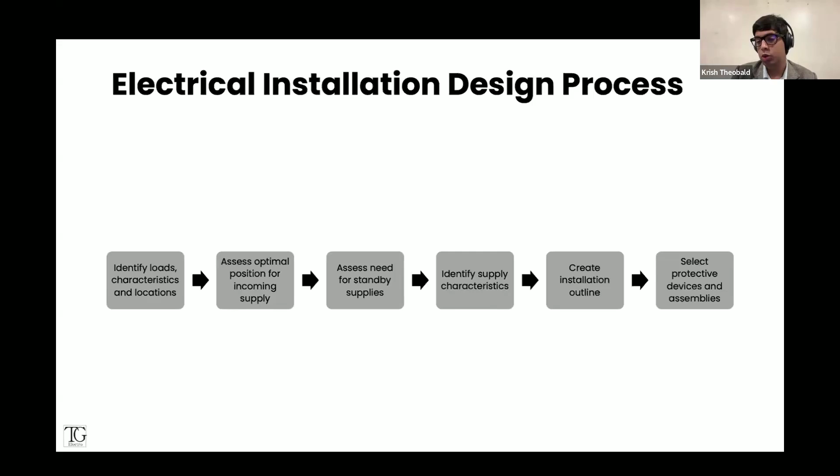Once we've decided what we want where, we need to now select our protective devices and assemblies. So this could be your circuit breakers, fuses, RCBOs, the actual panel boards, your distribution boards, so on and so forth. Then obviously it's a matter of selecting cables. So when we select cables, there are four things that we generally look at. Number one, we have current carrying capacity. So obviously, how much current can the cable carry in normal operating conditions?

Voltage drop. So is the arrangement able to provide an adequate voltage to connected equipment, the voltage that the equipment actually requires to function? Most installations have the protective measure of automatic disconnection of supply for protection against electrical shock. And as we all know, the key thing there is earth fault loop impedance. We have a supply earth fault loop impedance, but the value of earth fault loop impedance and the contribution of fault current at the extremity determines whether the device will disconnect or not. So we need to adjust the cable size to ensure adequate earth fault loop impedance is present.

We also have the cable size for prospective fault current. So, like I said, earth fault loop impedance you're talking about at the extremities, so minimum fault current. But towards the origin, at the distribution boards closer to your protective devices, we've got a relatively high prospective fault current, maybe prospective short circuit current. So it's a matter of can our devices interrupt that current, and when the device interrupts that current, your MCCB or fuses or circuit breakers, whatever, can the cable withstand that let-through energy? And this calculation has to be run from your minimum short circuit current or fault current to your maximum short circuit current and fault current.

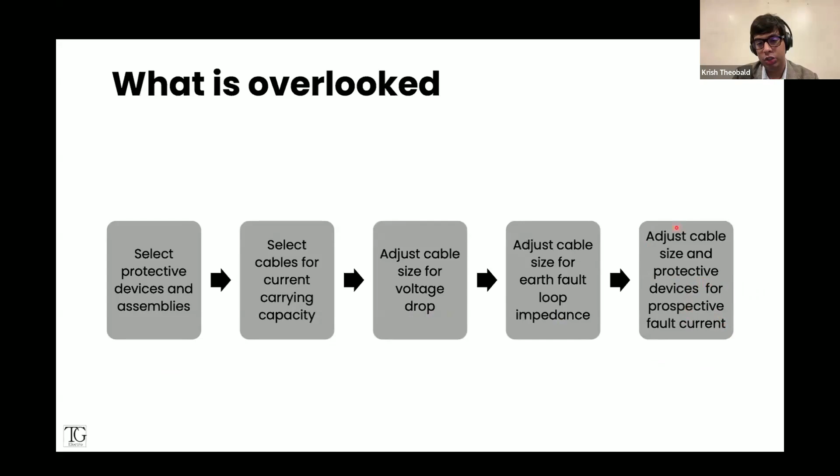Voltage drop, yeah, we do it, but how exactly do you do it? Let's look at it. Earth fault loop impedance, we don't really do, unfortunately. And those that measure earth fault loop impedance measure after the installation is erected, and then, well, you can't really do too much once the cables are already installed. And obviously, we do talk about protective devices for prospective fault current and short circuit current, but cables we don't really think about so much. So, what are our protective devices?

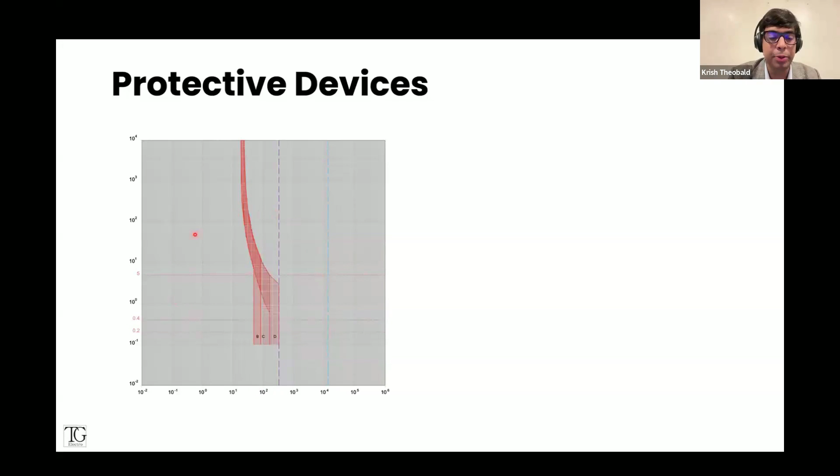We've got the MCBs that generally we use, or we also have circuit breakers like your MCCBs and fuses. These have certain tripping characteristics. And we've got your RCDs. So, overcurrent protective devices and residual current devices. Now, we know that there are the AC, A, F, and B types, but we shouldn't be using the AC. So, what are the protective devices we should be using?

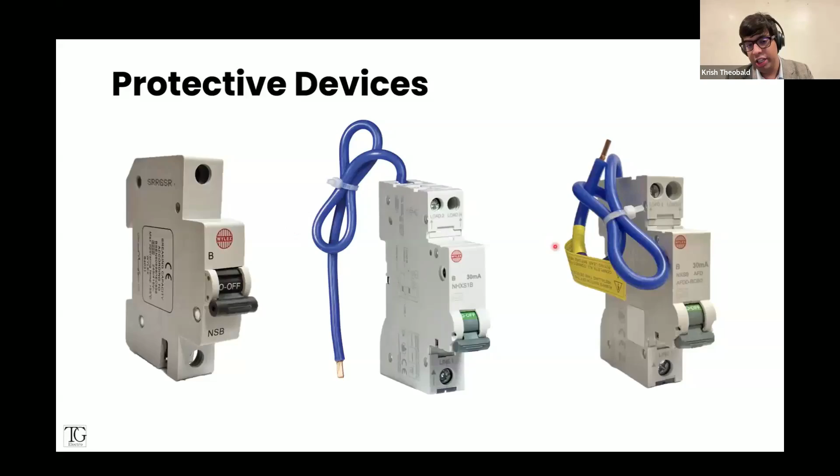So we've got your MCB here, your RCBO here, and then your RCBO AFDD as well, which is now required in certain locations like domestic dwellings. Assemblies, this is an important one. We tend to select protective devices rather than assemblies, because remember the product that we use in the installation is an assembly. So we have the 61439 series of standards.

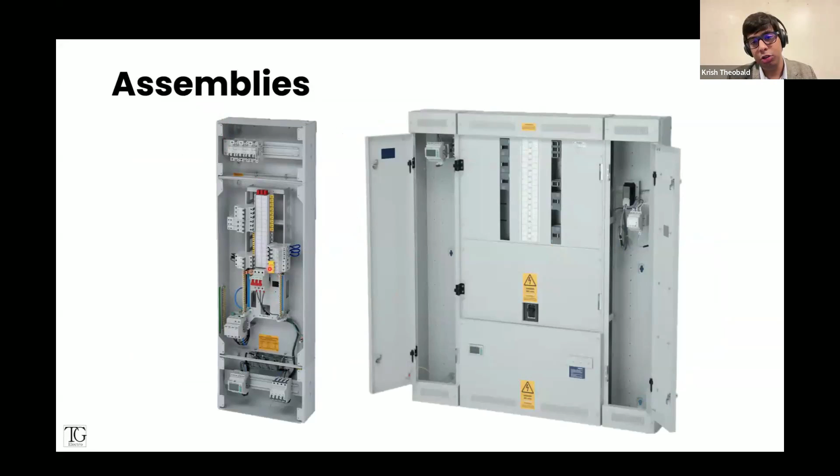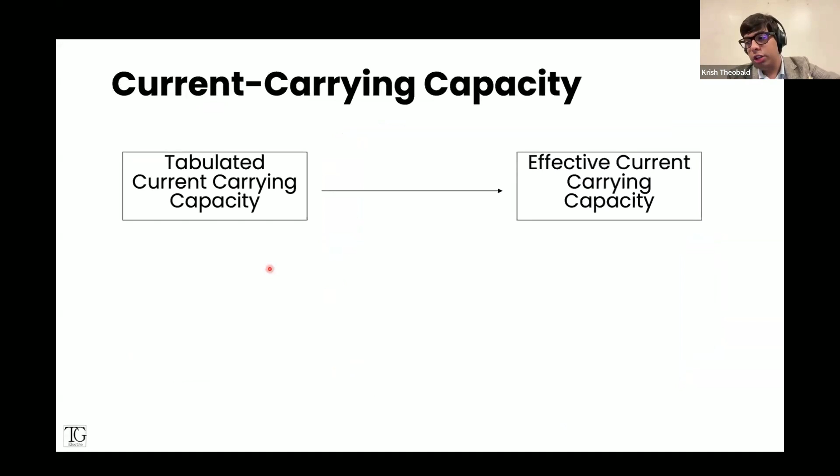Now, if it's to be operated by ordinary persons, the assembly, which is the protective device, bus bar, everything together, has to comply with 61439-3. So we have to select our assemblies accordingly as well. Current carrying capacity. Now, we have your tabulated values, which are what the manufacturer says, 2.5 square mm carries 20 amps, for instance. However, these values are very rarely what the installation actually will use because we have to correct to our effective current carrying capacities.

Most importantly, we have the factor of grouping. So, how many cables are grouped together? I often hear that in a single 25 millimeter conduit, we have something like 6 circuits, which is entirely ridiculous. Not only because it breaks the cardinal rule, which is only occupy 45% of the conduit's internal cross-sectional area, but because we're now affecting the cable's heat dissipation greatly.

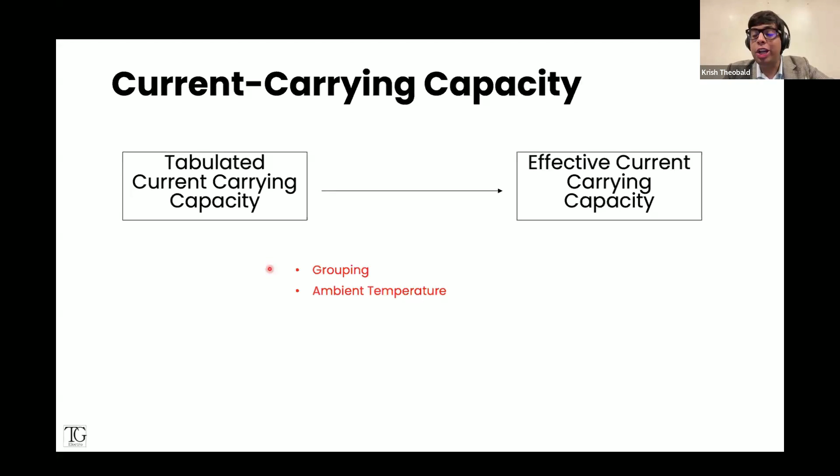Ambient temperature. So, what is the ambient temperature? The cable is tabulated to carry a certain amount of amps, rising from the ambient of 30 to the maximum operating of 70. But if the ambient itself is higher at say 40 or 45, then the cable cannot rise that much anymore. If you bury the cable in soil, the soil's ability to dissipate heat is also a factor. And if you have surrounding insulation, that's also a factor. A lot of new buildings are seeing this now. Obviously, how deep you bury it also matters.

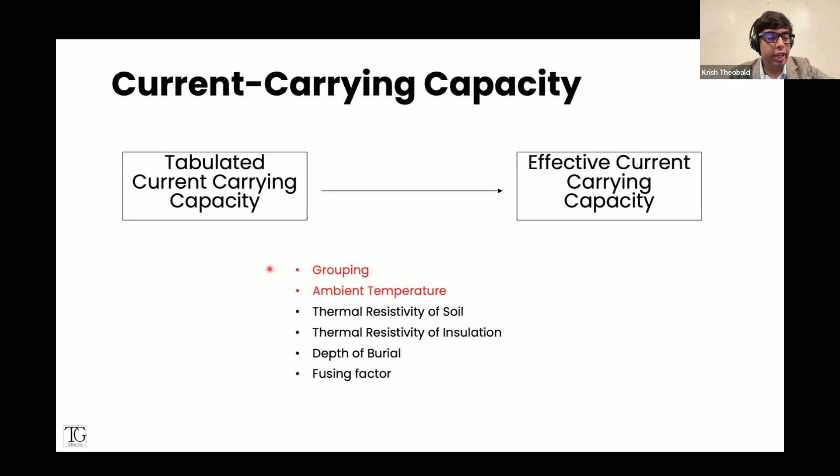And if you're using a fuse, such as an HRC fuse or a KitKat fuse, then there are certain other factors that kick in as well. I'll show you some more details. So grouping, well, we often see installations like this where the cables are very neatly tied up inside, but unfortunately, very seldom are the actual grouping factors taken into account. When you do this, you're essentially impeding the cable's ability to dissipate heat and maintain that maximum operating temperature, usually 70 degrees. On the other hand, you have this cluster where you've got so many conduits and so many cables.

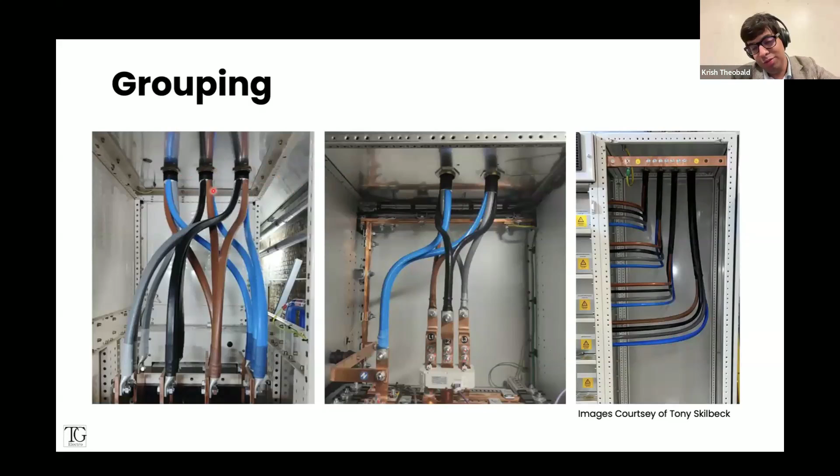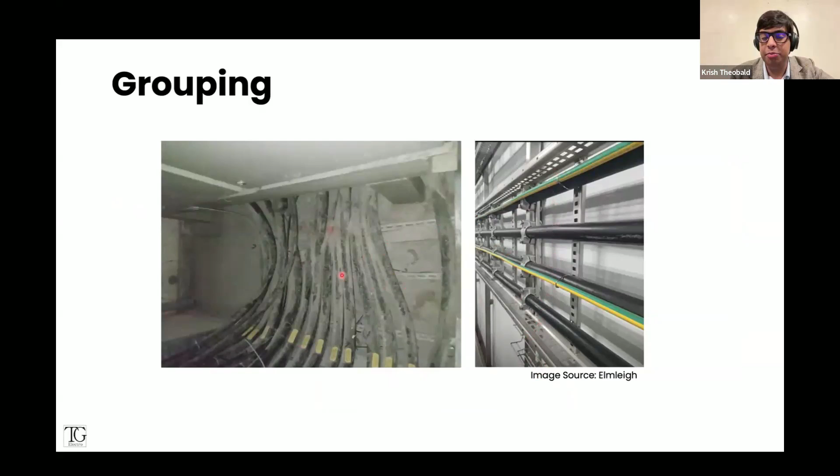Same story here. This is an image from a friend of mine in the UK, Tony Skilbeck. So, if you want to actually mitigate grouping, in most cases you can do this by maintaining two times cable diameter spacing between cables. So if you have a 10 millimeter cable, just maintain 20 millimeters between. Then, in most cases, you don't need to take a grouping factor into account. We look at our cable shafts. Unfortunately, this is what we see. Simply maintaining a two times cable diameter spacing in most cases mitigates the need for grouping factors.

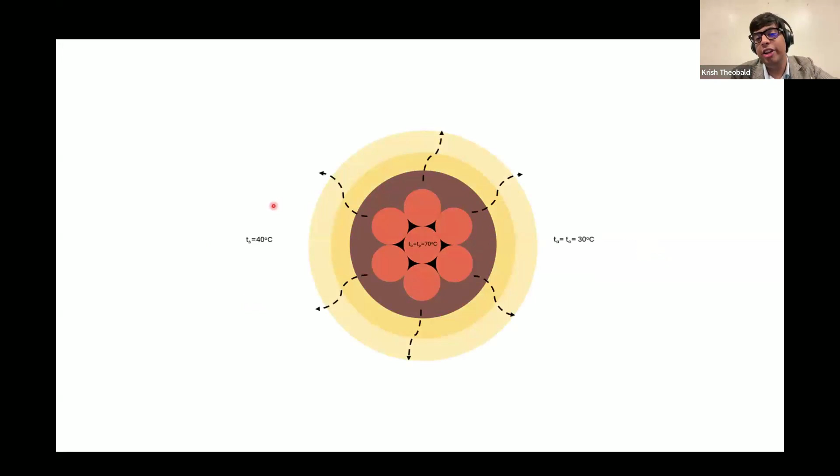So, ambient temperature. Like I said, assume we are 30 degrees outside, 70 degrees inside, right? When you are running the cable at a maximum operating temperature of 70 degrees Celsius, 30 degrees outside, 70 degrees inside, there's a 40-degree rise in temperature that the cable can handle. However, in most parts of the country, we see temperatures up to 45 degrees Celsius as ambient. What this means is that the cable can now only rise by 25 degrees. So earlier it was rising by 40 degrees, now only by 25 degrees. So obviously the current carrying capacity has to reduce.

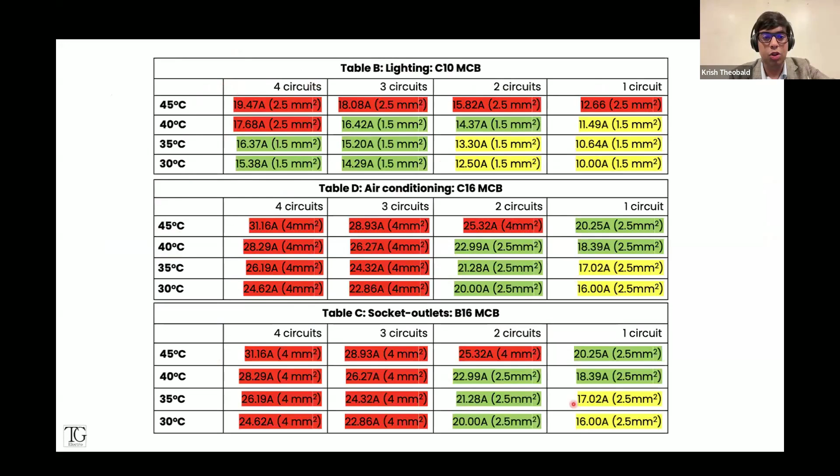Conductors as well, we've got our class 2 and class 5 conductors. We know that we have to use class 2 only in India. Voltage drop, of course, we've got 3% and 5% for public supplies, 6% and 8% for private supplies.

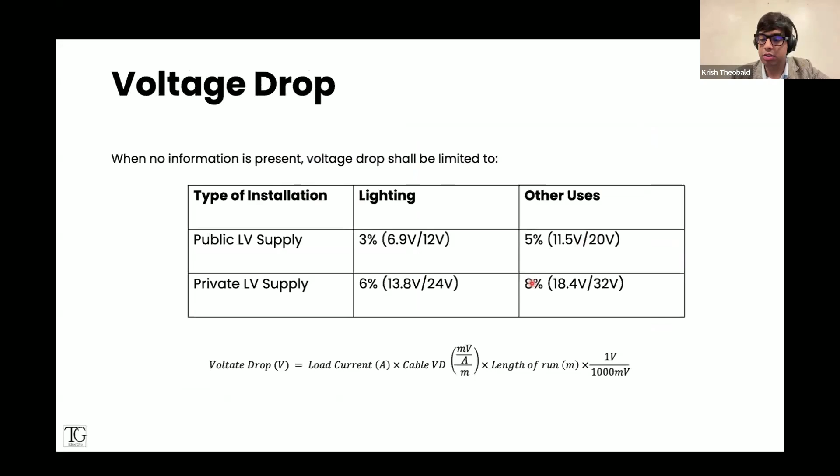Earth fault loop impedance, very important again. So, the earth fault loop impedance has to be lesser than or equal to U0 by Ia, or Zs into Ia lesser than or equal to U0. In India, we apply a two-third factor to correct for temperature. So that's that as well.

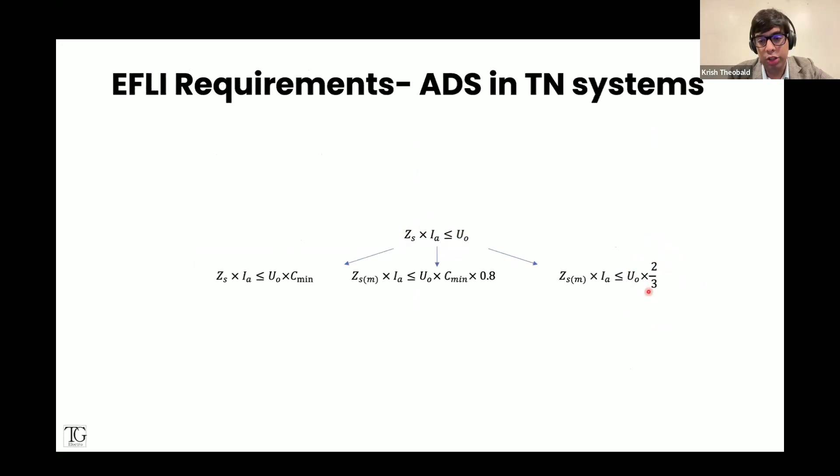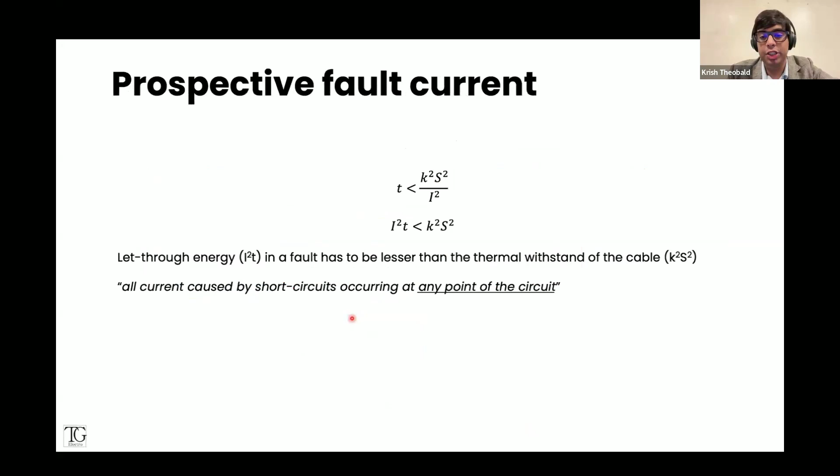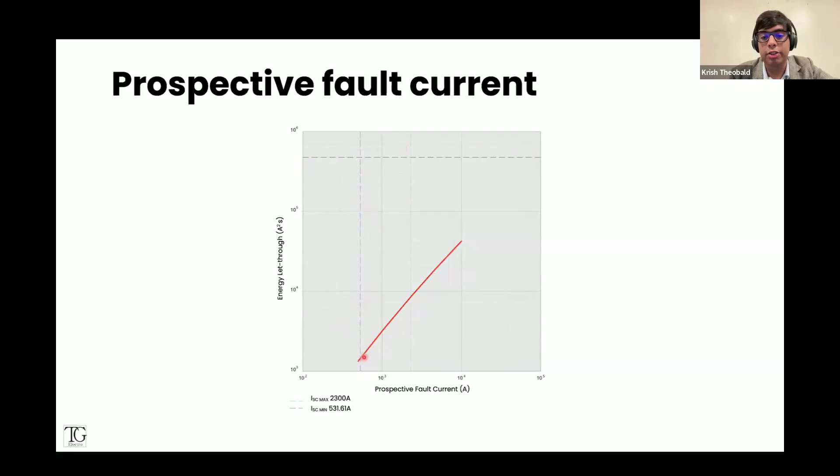So this will be a short circuit current at your extremity. This is your maximum closer to the protective device, and this is the withstand of the cable. So does our device ensure that let-through energy is always less than the cable can withstand? So in this case, yes.

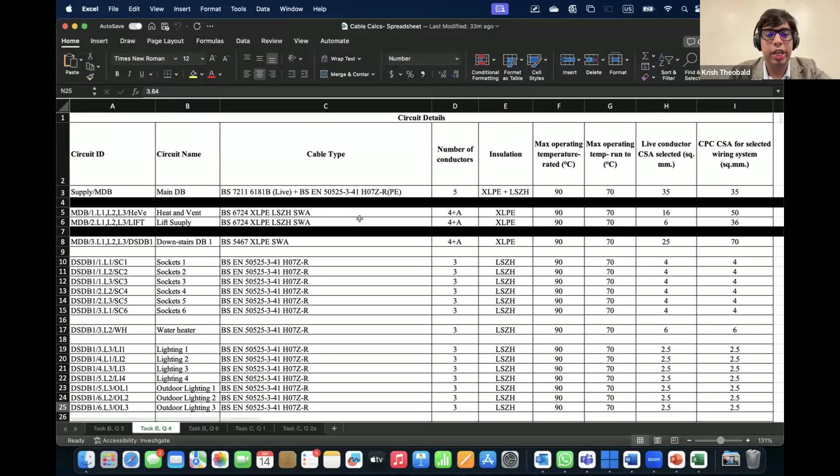Now, how do you do all this? So we can do it longhand. Obviously, I'll show you some spreadsheets as well. And yeah, it gets pretty complicated. Or you can do it with the software. So let me just show you what we're really looking at. So you see, we've got here our cable type, number of conductors, insulation, so on and so forth.

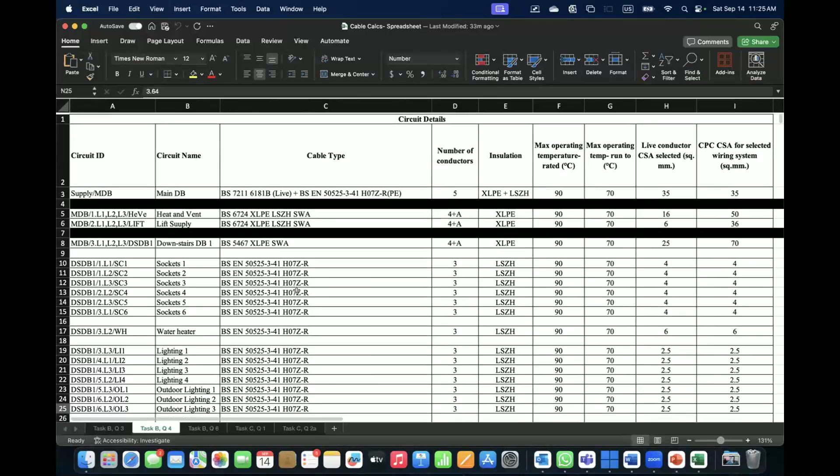What is the protective device we're using? Sorry to interrupt, Krish. Yes? Could you please speak a little louder? We are getting a lot of messages in the chat box. Yeah, little louder. Okay. Let me just see if something is affecting the volume I'm speaking at. Okay, little louder it is then.

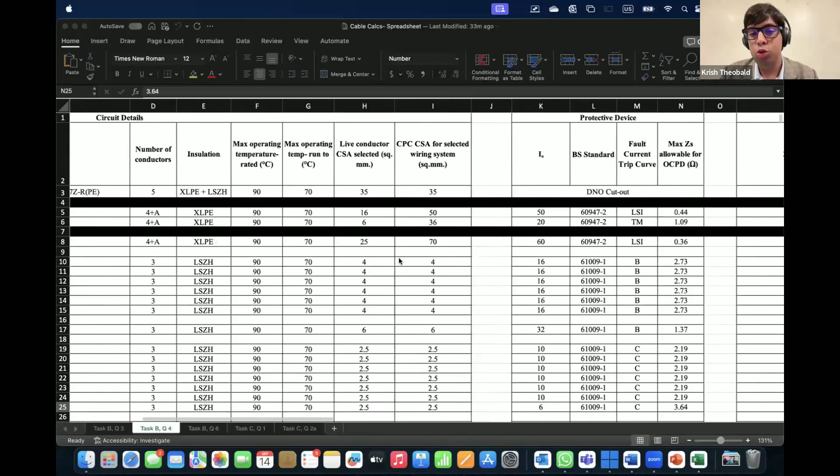Right. So we've got cable type. What is the cable? What is the maximum operating temperature? What are we running it to? Cross-sectional areas. What is the protective device? Then, what is the earth fault loop impedance? What is the resistivity of the cable? So then what is the earth fault loop impedance going to be? Is it okay or not?

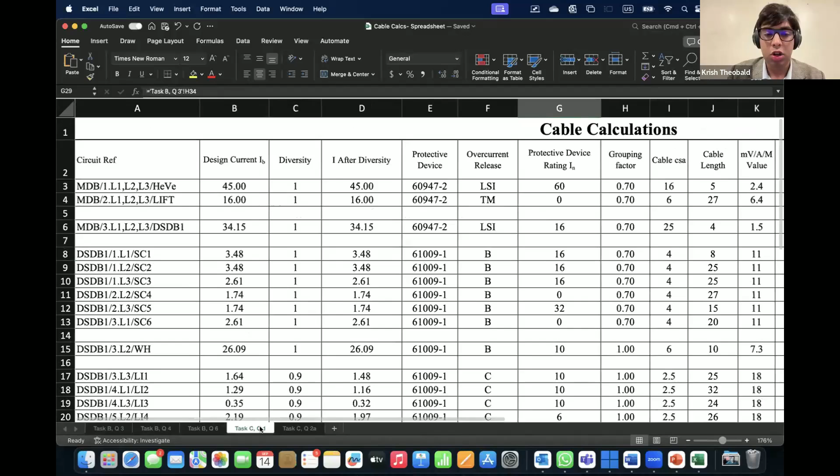Then is the protective conductor selected? Can it withstand the energy let through by the protective device? Is it okay or not? You've got your current carrying capacity, obviously, so all your rating factors. What is the voltage drop? Again, what are we running it to, and is it okay or not? So maximum demand and diversity is also there. A lot of things are there, really. Anyways, so coming back to the software, let's just open it up.

So this software is basically developed by a company called Modic which is based in Cyprus. They majorly make for the UK market. So the way it works really is that, as you know, I've been in the UK for electrical design. And essentially, what I figured is, knowing the standard is one thing, but saving time and ensuring that you're not doing any donkey work is another thing.

So the software is pretty much the gold standard to use in the UK and a lot of IEC markets as well. But in India, even if we want to comply with the standard, we don't really have access to a software. So we've partnered with Modic to bring this to India, developing an engine for NEC.

Anyways, let's just go through a very simple situation. So if I were to consider a simple source, I'm just going to add a source for now, and then we will look at the actual model that we will develop. So, say it is a simple user-defined source. We've got certain earth fault loop, prospective short circuit currents, prospective earth fault currents, and obviously symmetric short circuit currents. We've set our voltage supply. It's a TN-S installation, let's say.

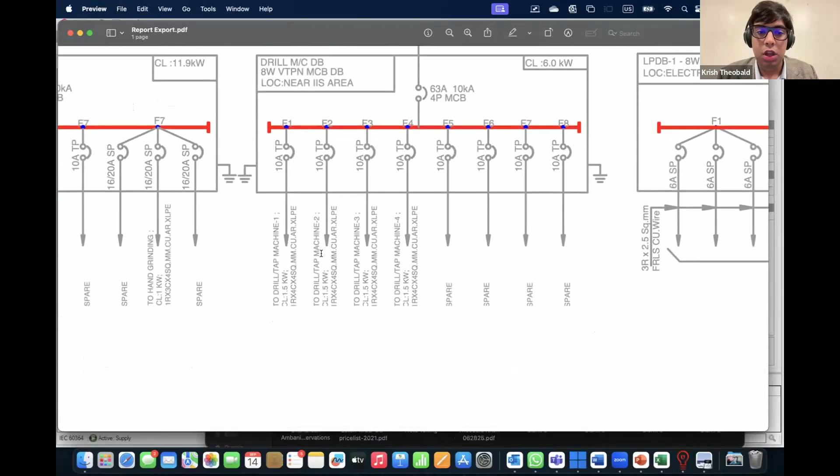Now, if I were to model a particular installation, for example, this installation here. So, pretty simple. So the first thing I will do is I will also get my CAD plan. So if you just allow a moment for this.

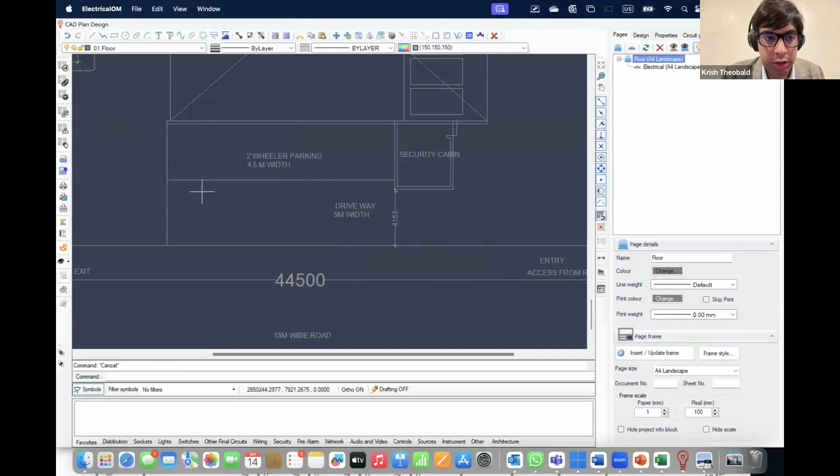So draw a line, 2 points, actually 5 meters. So I'll draw, excuse me. Yeah, 5 meters, that's fine. So I'll go here, to here, and now scale the drawing. Now we can see that the drawing is scaled. So if we look at any of the other lengths, for example, this is 2.5 meters. If we measure the actual length, we will get the right value,

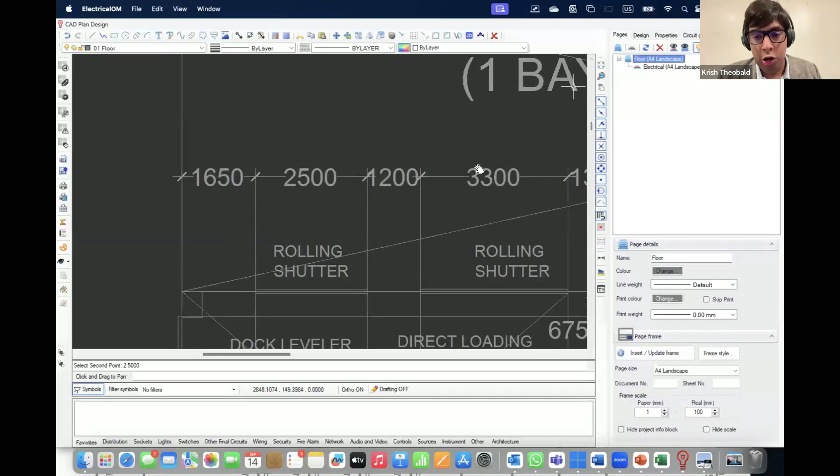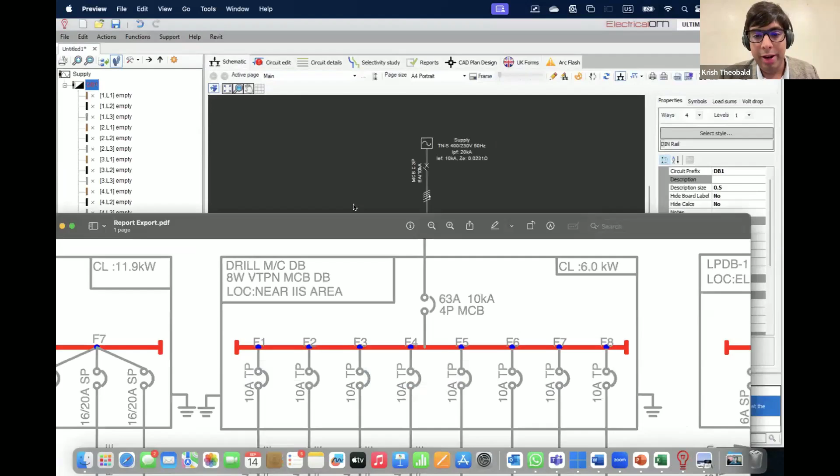2.5. So now that we've scaled our drawing, let us be creative because it's not an actual project. Let us assume that this existing panel room is what we will use. So we've got our supply, it's like this, and let's introduce a distribution board, three-phase board. Now, if we look at the original schematic, we have a 4-core 16 square mm aluminum armored cable. So let us go ahead and select that.

So I am going to select Indian standard, IS7098 aluminum. We'll run to 70 and we'll clip it direct, and we will do 16 square mm. Now you see the software is immediately giving me a warning because at this point I've got 20 kiloamperes of short circuit current that is possible, but the current default device can only do 10. In this case it's an MCB, but because we have assumed a higher short circuit current, we're going to select an MCCB.

So uncheck all, MCCB. Let's say, for example, it's a Siemens, and let's select a nice little ETU 350 product, set it to 100 amps, and we will down set it to something like 63. Brilliant. Now, it's giving me a warning that the 16 square mm is not enough because I need a minimum of 63, but in this arrangement, the 16 square mm can only carry 51. So that's where this comes into the picture. I can select a reduced 3.5 core as well if required.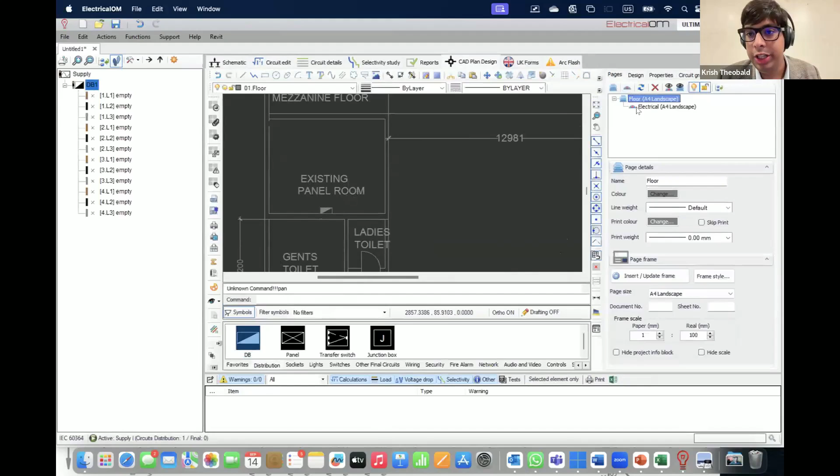Now, if I save, see the warning disappears. Now I've got my cable, and there's going to be an isolator here as well, and that's fine. Now let us model this on the actual board. So I want a DB, I want it here, I will put that here. Now, the first thing is, this is the floor layer. We want this to be in the electrical layer. So move to page and electrical.

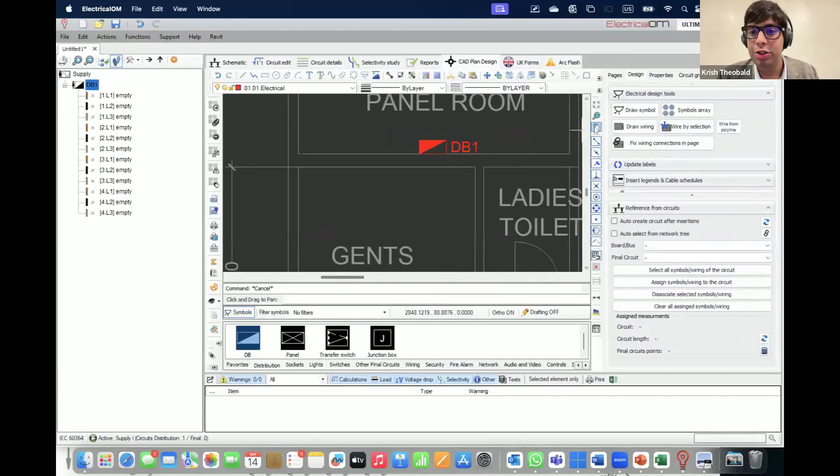So this is our distribution board. Now I will assign this distribution board to that in the schematic. So I will go to DB1, assign. So now this is my DB1 in my installation. Now, if we take a circuit, back to our SLD. We've got some drilling tapping machines here, 1.5 kilowatts each. Say it's a 10 ampere MCB and 1.5 kilowatt load. This is saying use a 4 square copper armored cable.

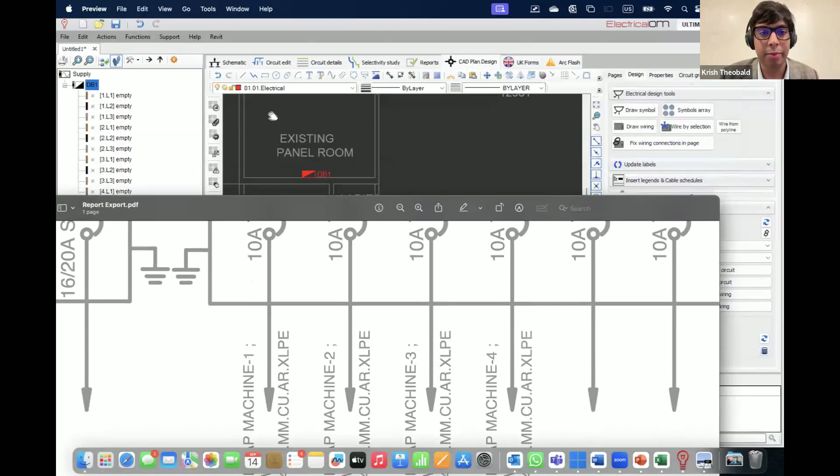So let's do that. Insert. This would be a final circuit, three phase. Let's again look at our schematic. It's a 10 ampere three pole MCB. Say you want Siemens, uncheck MCB. Say, for example, it's the 5SY series, or the 5SL, let's keep it simple. Say it's a type B in this case, as it's a drilling machine. So we'll take a slightly different device. Let's take it as type C10.

Actually, hold on. Yeah, higher. Now, let's say the run was 20 meters. So the cable is actually running 20 meters. And now again, Indian standard, copper, multi-core, so IS7098, we'll run it to 70.

Now, supply changes. Once again, you see the software is giving us an actual error because the device selected is a 6K device, but actually we will have 10.28K there. So this is what the software does. So now if you see, if I were to,

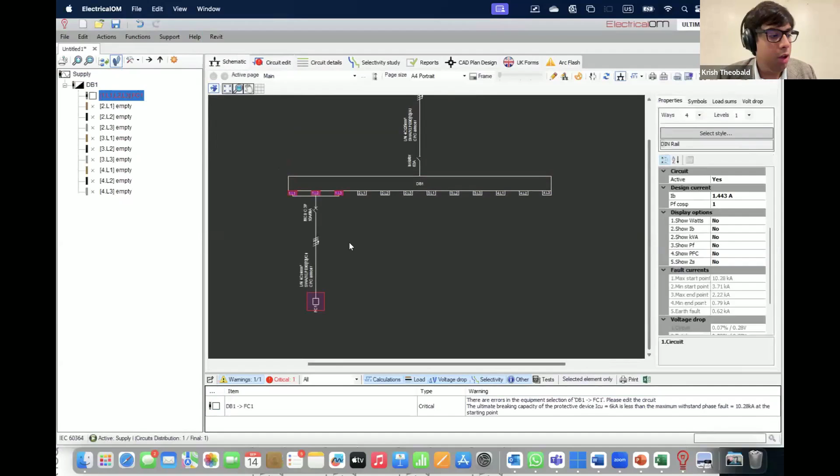Sorry, one moment, please. A little louder, I see.

Okay. Right. So you see the issue that's come up, which is how the software is quite intelligent, is that essentially I've selected a protective device with a 6K breaking capacity.

But the software has calculated that at this particular point, actually I have a maximum phase fault of 10.2K. So if I now change the protective device, this fault will go away. It's only 6K here, sorry. If I now take a different device, say an Eaton device, MEMShield 3, say a 15K type C, 10 amps, and now I refresh, that fault goes away. So the software is quite intelligent in that sense.

Anyway, so now we've selected the load. We need to enter what we call our fault current. Sorry, what is our actual load? So this tells us that we want it to be 1.5 kilowatts. So I will enter here 1.5 kilowatts. Say I have a power factor of 0.8, static. Total load, and say I have a third harmonic value of 15%. So now it's giving me a warning saying the power factor is low because it's below 0.8, and that's fine.

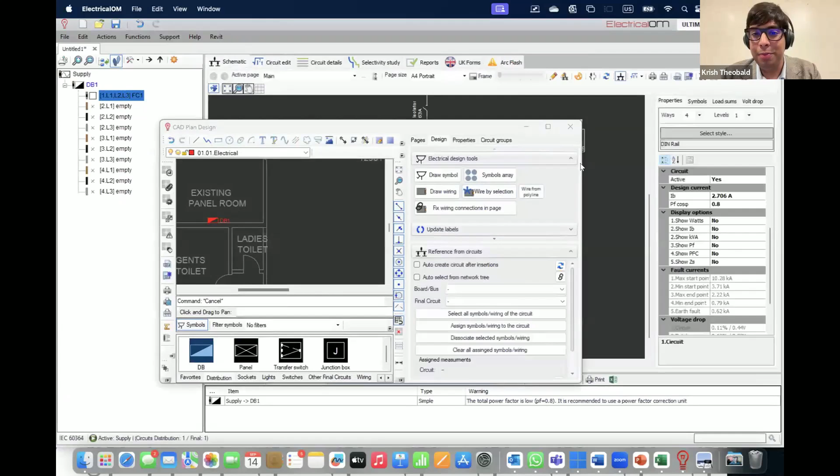Now, so I've got my circuit here, but what does it look like on our CAD plan? And this is where it gets really interesting. So, say for instance, this drill tap unit is this one here. So I will just put in other final circuits, and I can put in a fixed device. So say I put that there, and right next to it, I have this here. Now, how do I wire this essentially? The software can do it in two ways: draw wiring, and wiring by selection.

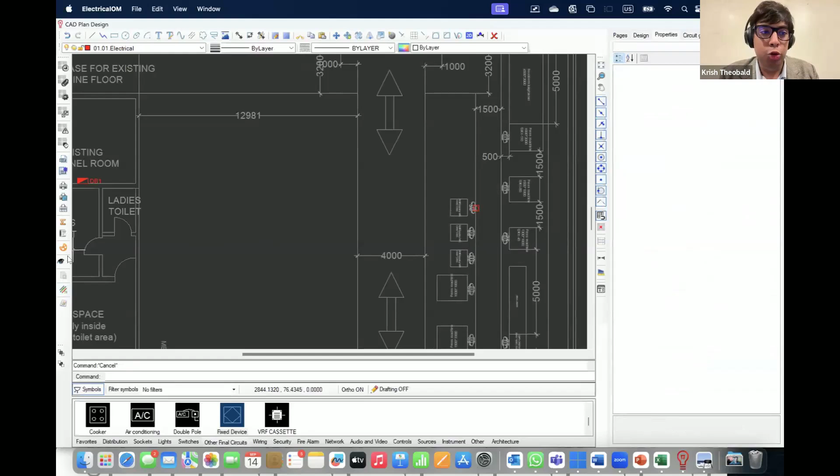So firstly, let's see what height we want this to be set at. Go to properties. Currently, this is set at an elevation of 0 meters. But say I want to set it to 1.4 meters. If you view it in 3D, we've got it at 1.4 meters as well. Now, how do we actually wire this? Obviously, you can put in cable trays, whatever we want. But let's say that we wire it at the ceiling. So that'll be 3 meters. And we wire it from DB1.

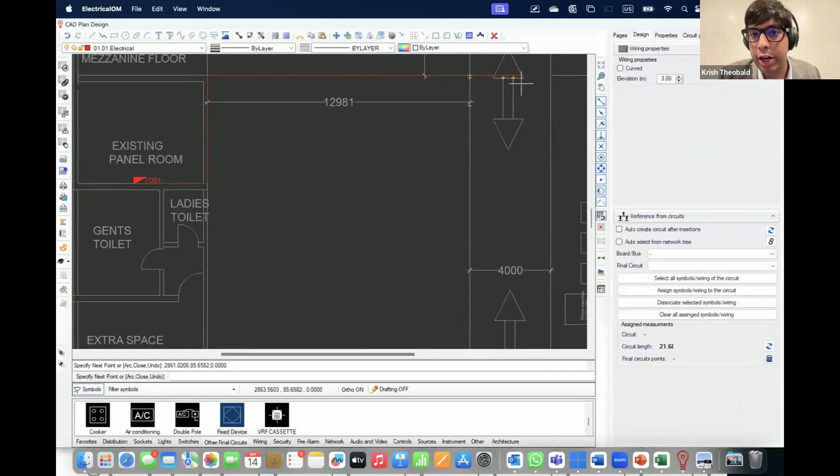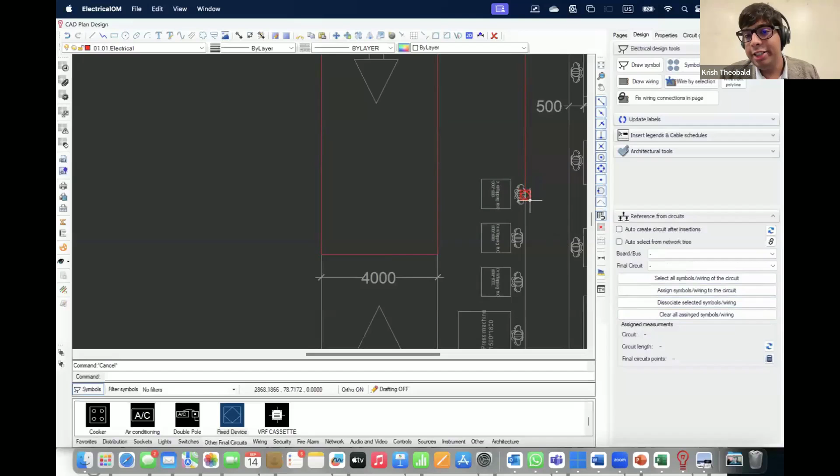So let's run it just around this wall, just like this. And let's say it had to go down somewhere here to cross. Go all the way like that. And now it terminates over here. So now we've done our wiring. Now the interesting thing is, if I select this wire, I now know how long it is in 3D. For example, if I select DB1 and assign it, you see now I know that it is 56.1 meters long. I haven't assigned this point of utilization. So once I do that, now I've got one final circuit point and 56 meters.

So now if we view this in 3D, you see I've got from my DB to my point of utilization. The interesting thing is now because I've assigned it, this phase neutral conductor, let me just make sure that it is assigned again. Yeah, I have to apply it, my bad. Apply to circuit. There we go. Now, if I go to FC1, you see 56.01 meters is my length. So this affects my calculations for my earthing. It affects my calculations for the protective device, correction factors, everything.

When we talk about correction factors, say I've got four circuits next to each other, ambient temperature of 45 degrees. It's not a problem in this case because our load current is relatively small as well. So that's how it works. Now, obviously, this has done the calculations according to everything. For example, what is my fault current at the end point? What is the fault current at the start point? How much electrical energy is there?

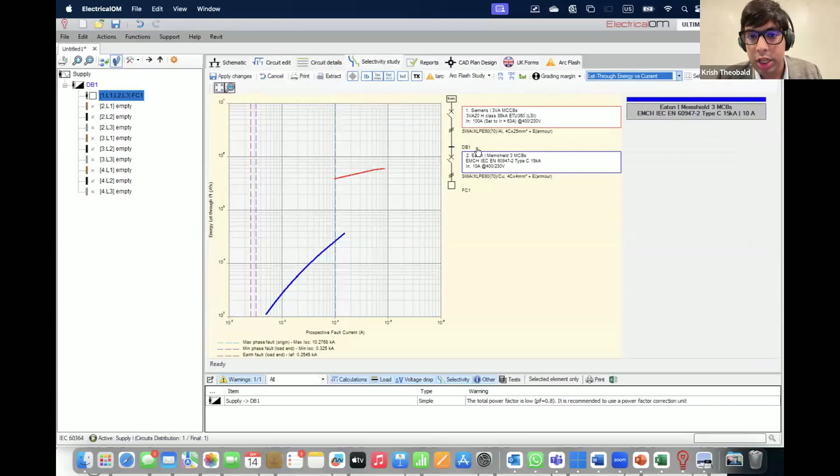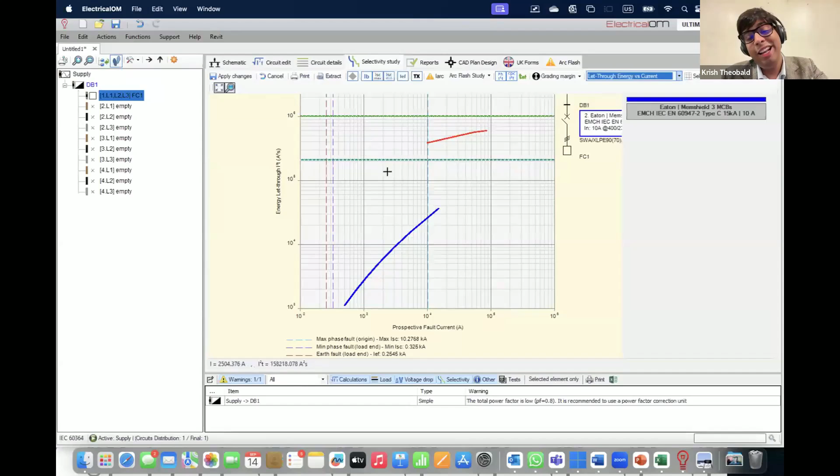If you go into our selectivity studies, you can see here that for both conductors, this is for our phase conductor, this is for the armor. The device is always allowing lesser let-through energy. So that is your thermal withstand analysis essentially. Then say we go to a protective conductor, it says this is the conductor, this is the length, this is the cable, this is the armor, this is the minimum current carrying capacity required.

So whatever cable ID we want to put, is it an FR cable? Is it rated to 70 degrees? Is this the maximum operating temperature? So on and so forth. Now, for example, in India, it's very common to not only utilize the armor, but have an external conductor. So I will say core of the armor and separate conductor. Say it is touching. We want a copper conductor, and we set this to another 4 square. So now we're good.

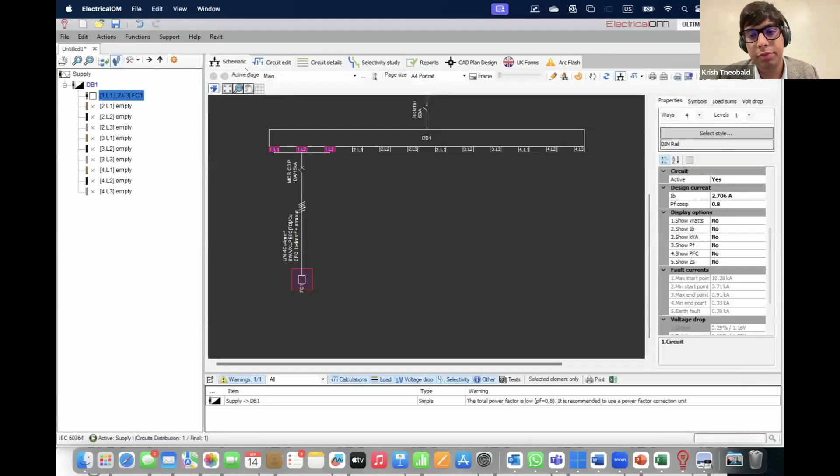Now let's look at one of the other ones. In this case, these are all drill and tap machines. So I am going to switch it up a little bit because this was a relatively easy circuit to model.

Say for example, I want to install a socket outlet circuit. I'll do that here. I will insert a circuit, a final circuit, single phase. We'll choose a D16 RCBO this time because you'll need additional protection.

You can select type AC, AF, and you see by default it selects type AC. And say we run it in steel conduit, so metallic conduit, heavy, 25 meters, and we can put in a number of bends that will do that calculation as well.

Now it's asking us, is the circuit protected against mechanical damage? It's a requirement of the standard. So if I say yes, we're good to go there.

What is a circuit? Say for example, it's a radial socket outlet circuit. So I select that. I'm assuming say 200 watts per circuit. And how many circuits, I don't know.

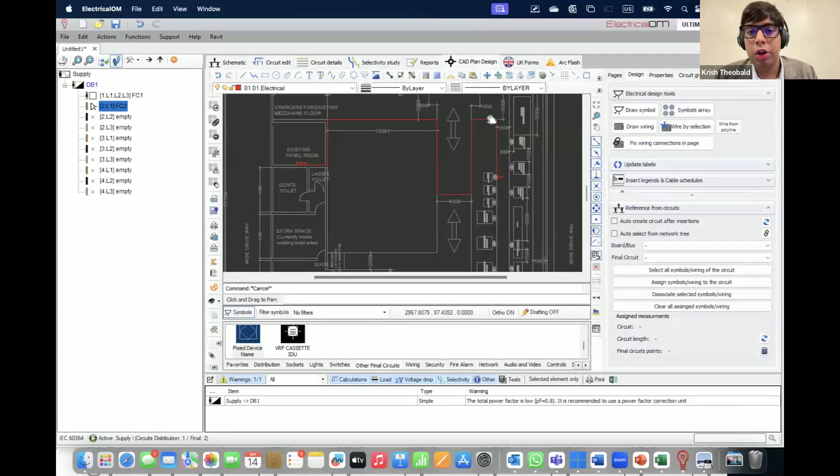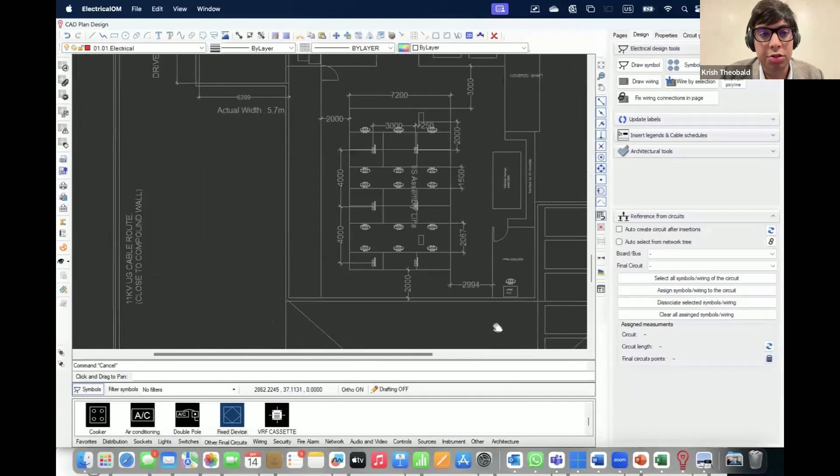Let's look at it in our plan. So what are we looking at? Say it is for a computer, right? Let us assume that we have this... how can we be as creative as we want to be? Let us say that people are deciding to work on some computers over here, in this open area. So we add in our sockets.

Say you want to add in a single socket or a double socket. Say we add in a double socket. It allows us to add it here, here, here.

Now, what I will do is obviously, aside from a socket, I also need some other things. For example, each socket I install, this is to generate your bill of materials. I'm going to need, say, a back box as well.

So if I go into... one moment, please. I go into your item codes. I can start adding items. So if I say add, I say 8 module back box, add, and per socket I want one back box.

Then say per this thing I also want some ferrules, lugs. Say I want to add... forget lugs, let's use a better example, connectors. So a three-way connector. Let's say I want to do two of the three-way connectors and one of the five-way connector.

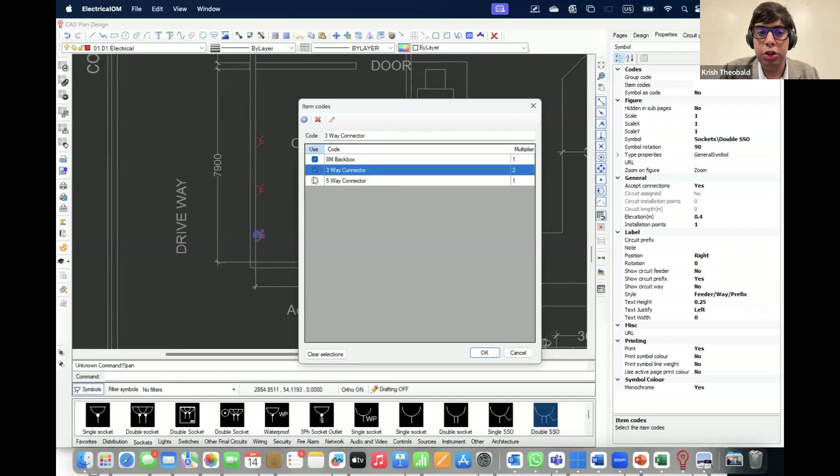So now I say I use all of this. Now you see, for each socket outlet that I'm adding, I get all of this. And I can select all of these. Another thing I can do is right click and say select similar. So I've selected similar, and now in item codes, I've got these all selected.

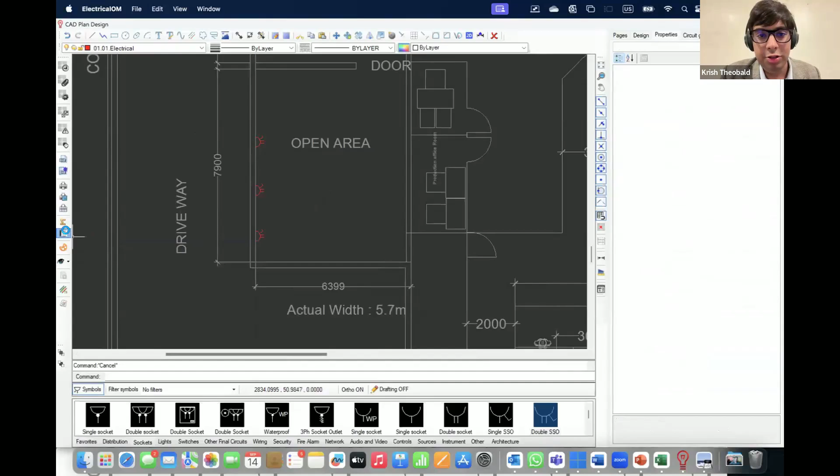So now how do we actually get the bill of materials? If I click on this summary, I say three back boxes, six three-way connectors, three five-way connectors. So now I've automatically got this bill of material as well.

But now, how do we actually correlate this to the actual schematic? If we go to our design and we say wire by, let's actually say what height we want this at. Yes, raise hands, Nandu and Lakshmi, all are monitoring the chat.

Now, this is assumed to 0.4 meters. Say I want to do 1 meter. Now, if you see, it's actually done to 1 meter, right there. So that's that.

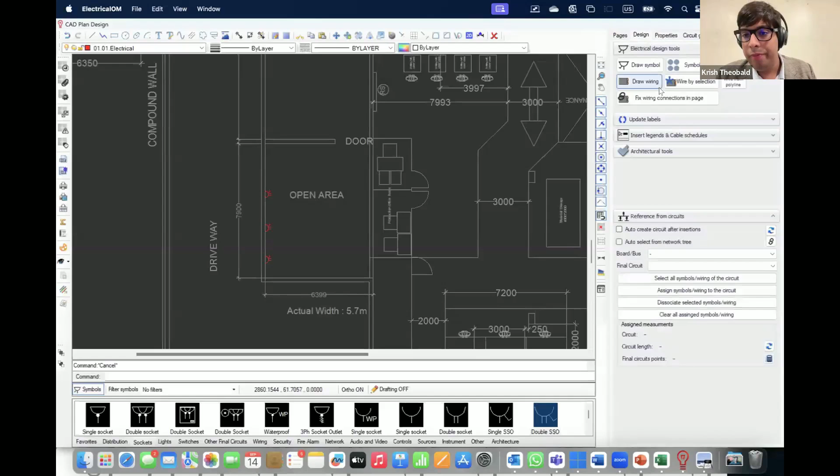Now, if we actually wire by selection, these three will be in 1 meter. So I go 1, 2, 3. I've got them wired. Now, how will the wiring actually go?

Say I want to wire this to the ceiling anyways. So start here, and for argument's sake, let's assume that we want to get this. For example, let's have it run here, here. Let's have it run straight up actually and meet the distribution board somewhere around there.

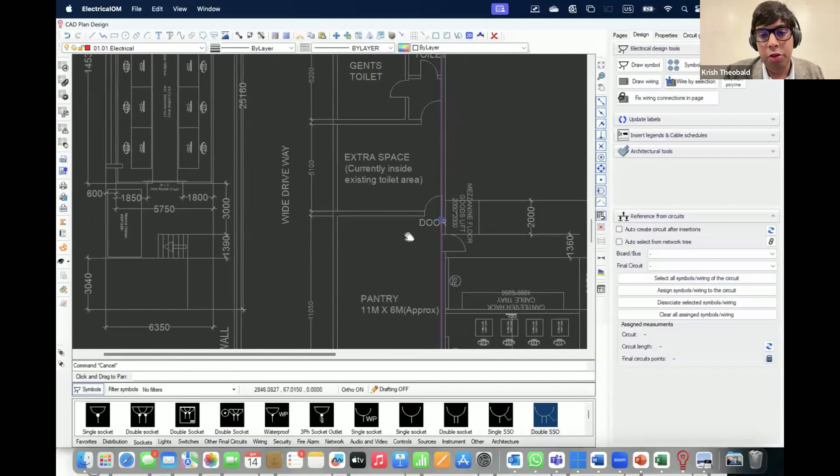So now what I'm going to do is select this cable run plus all of this. I'll say DB1 and this is FC2 assigned. So three symbols and three wires are assigned, and apply. Now you see 42.13 and final circuit points 3.

So currently we have set a double socket to be a single utilization point. If I do select similar properties and change this to utilization points 2, now it's automatically 6, and if I apply, that goes there.

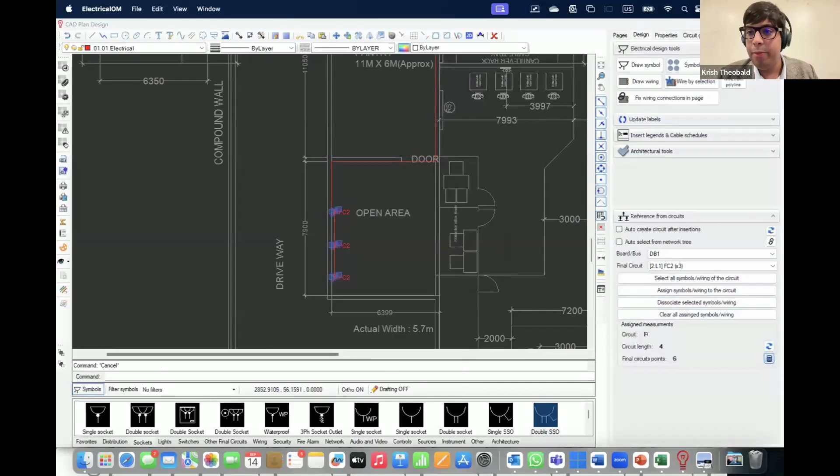Now if I shut the CAD plan add-on and go to my circuit edit, you can see I've got 6 into 200 watts and 42.13 meters. Automatically it tells me what the load required is. Now if I increase this to say 1000 watts...

Automatically it's now telling me that I have an issue - I can no longer use this. My load current is exceeding the protective device rating. So say if this was 700, that's still an issue. Well, is it? Yeah, still an issue. So we'll take it as say 500. Yeah, that's not an issue actually. Even 700 is not an issue - that's just a different warning.

I'll show you what I mean. So what it's essentially telling us is that we have a design current of 18.26 amps and our device is only rated to that much. So if I change this to say 500, I don't have that issue anymore.

However, it's flagging a voltage drop issue. So if I go to voltage drop, I've only allowed 3.5% voltage drop on this. I can obviously user-define it, say I want 4% voltage drop, but I'm actually getting 7.2% voltage drop. If I increase this from 1.5 to 2.5...

I'm still getting 4.57, which is relatively high. If I increase this now to 4, the voltage drop issue goes away. So that's how it actually works.

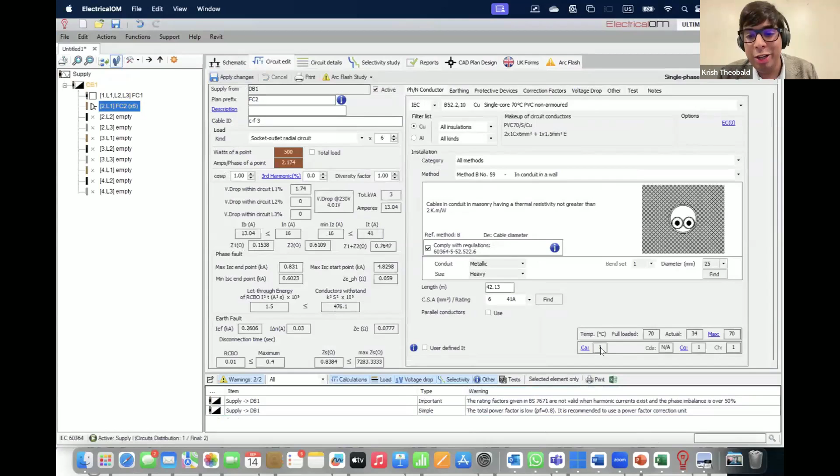So I'll need to do 6 square mm actually - now that warning will go away. Back to reports. So if I generate this report, and that's fine, it has warnings.

There you go. I can say TaG Electrotech Private Limited, office say Mumbai. Engineer is me, Theobald. Save. Project title is, say, XYZ Factory Mumbai. Client is, say, Nandu.

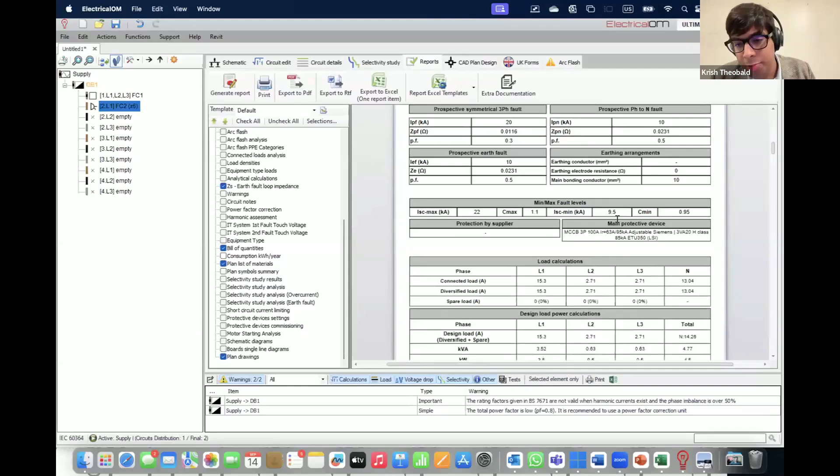So now if I regenerate the report, there we go, that's everything as well. So it gives me the supply characteristics, tells me these are the final circuits, these are the power factor harmonics, this is the load if you want to add a diversity factor, any spare capacity, these are the cables we are using and how they are installed.

So actually I will export to PDF and then do that so we can see it separately - there it is on my desktop. Go to documents, report export - export complete. There you go.

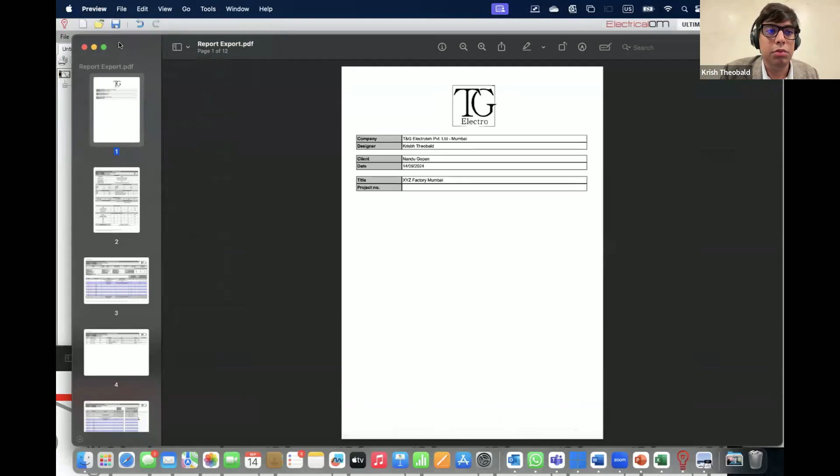So it gives me all of this information. This is the cable used, this is the voltage drop we're getting. Now does it pass the short circuit evaluation? So we are allowed - this particular device has 15K breaking capacity.

This has 10K. What is the actual short circuit current maximum? So does it pass? This is the protected device, this is the time it will actually disconnect in. What is the maximum time we're allowed as per NEC? And it says IEC 60364 right now. Maximum, this is the maximum for loop impedance allowable. So to actually use, this is where we're actually at - if you did it to 80%, this is where we're at.

Yeah, you can add in prices also. So this is a cable required, this is a conduit required - it can give us pricing as well.

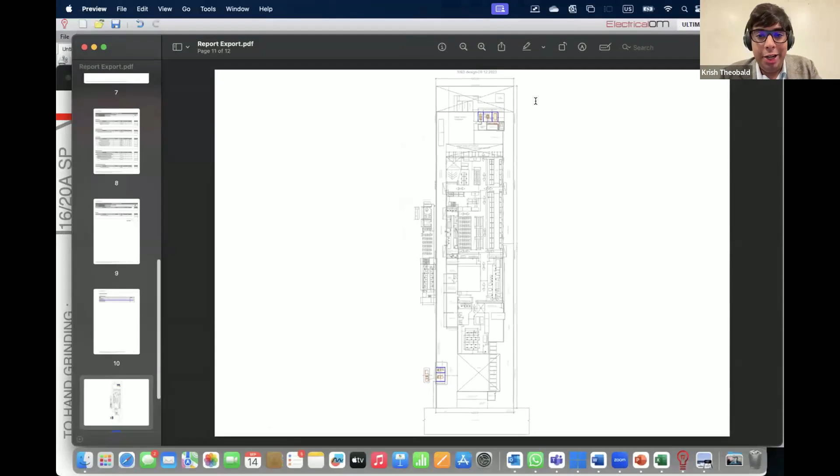So, this is obviously for the sockets we've used, and it actually generates a nice little schematic as well, a floor plan. And that can also be exported separately. Anyways, that's about it I had to show you.

Okay, yeah, we have a question. Krish, did you run a polling in between? Oh yeah, that's a good thing actually. I don't believe we've actually done the polling. So we want to actually understand what software you guys are currently using right now. I hear a lot of ETAP, some people have said Pro Design as well, but I want to know actually what you guys are using. So perhaps we could run a poll in the audience.

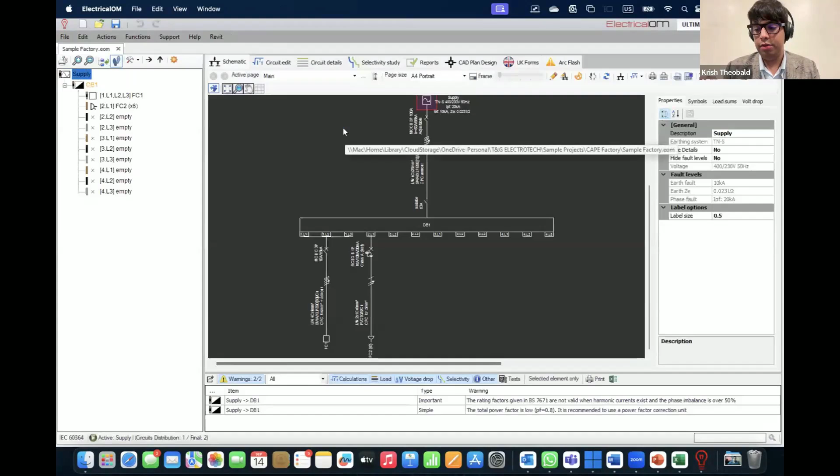Yeah. Right. So voltage drop. So say on this circuit, right? There are two ways of doing it. Number one, I can say that I want a certain voltage drop at a board and a certain voltage drop at the final circuit and any extra allowance. So this comes to a total of 5%. So this is there. Number two, I can say in this circuit I want only 2% voltage drop. Now, if I put 2% voltage drop, you see it will flag a warning because it's actually 2.01 here.

So I can set either remaining from the board or a predefined value. For example, here, if I say remaining from the board, 1.5, because it's a socket circuit, we are allowed 5%. So if I go to the board now and I select voltage drop, here I say 1.5%. If I change this to say 1%, and I go back here, now I get 4% here. So it is entirely dependent on whether you want to set it individually for the final circuit or for the board. It's up to you how you want to set it. That is okay. It's clear.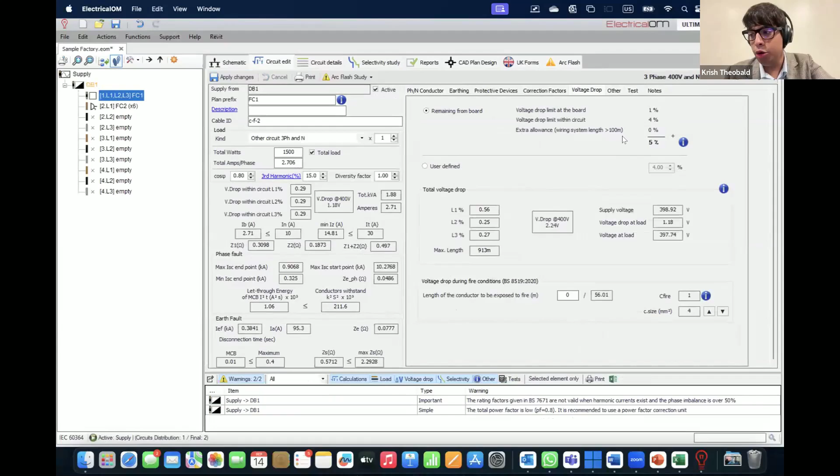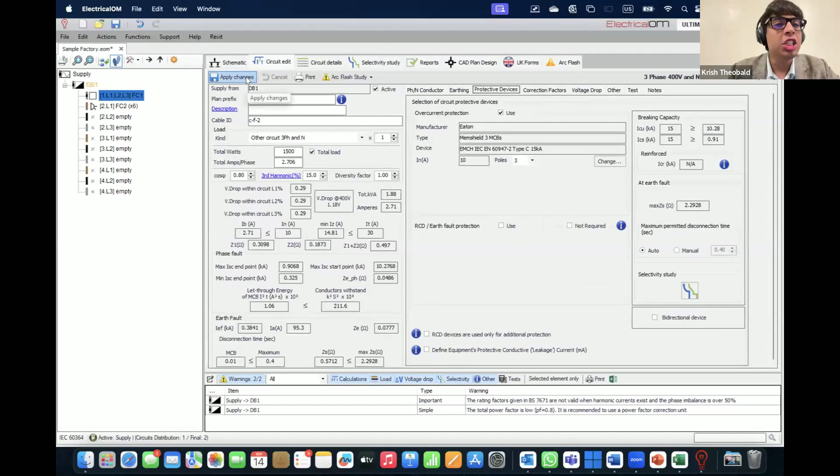Now the second question is: are we actually in the software talking about insulation coordination level? Sorry, insulation coordination level, could you elaborate a little more? The service entrance switchgear will have a different impulse withstand, and inside the DB you have a different impulse withstand voltage. You don't need to have the same voltage impulse withstand level for all switchgears. That's correct. So this software is primarily a calculation engine. So stuff like the impulse withstand level, you can enter.

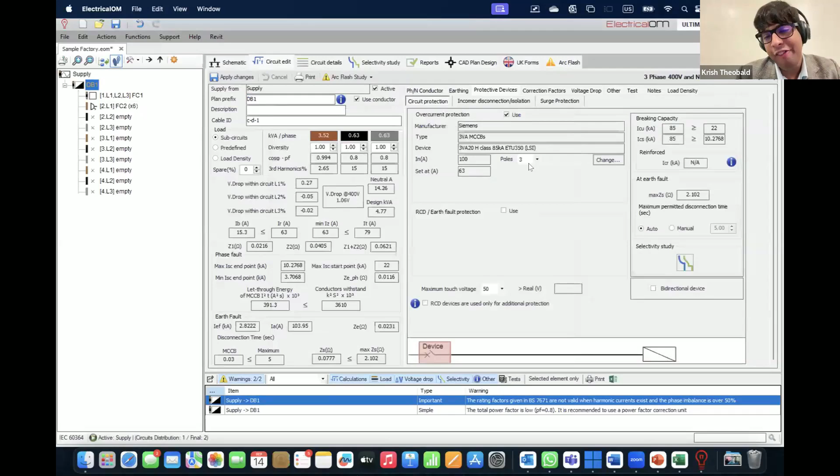The reason I ask this question is because you have a library of products, and the library will have the voltage level as well. So it would be very easy if we select the wrong product, it can flag that. Yeah, that can be added. The library is very dynamic. Say tomorrow you want to add a product that's not in this library, you send it to us, and we will add it within a couple of days. Then impulse withstand, everything will come into the picture. If it's not there, the software doesn't do those calculations because there's no calculation to run. But you can enter that information so that it comes in your reports. Okay. You had a couple other questions as well.

I think initially you showed some BS symbols, and right now what I am seeing is IEC symbols. No, that was just a reference to a guidance note. Actually, that was not a BS symbol. It is IEC only. Okay, right.

Okay, thank you, Amrit Lal. Thank you for interacting. I'm going to lower your hand. Rajesh Goyal, if you're still there, I'm allowing you to talk. If not, I'm going to lower your hand. Yeah, Rajesh, go ahead. Please go ahead, talk, Rajesh Goyal ji. Yes, yes. Rajesh, what's your question, sir?

This is a very good software. I was using ETAP earlier, and I think this is something different from ETAP. Yeah, absolutely. It requires a lot of engineering for me, and definitely it will help me resolve all types of selection of cables and switchgear, and let's try how it will work for us. Thank you, sir.

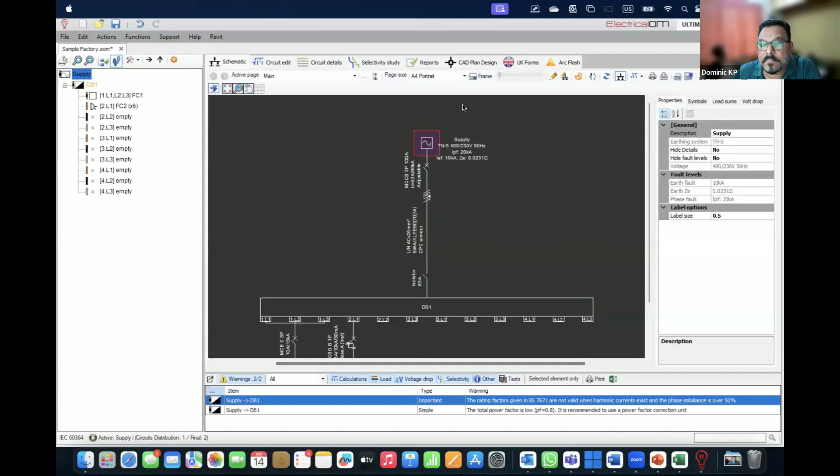Sir, Gopal sir, can you take these questions? I'll just come back in 2 minutes. Yeah. Shall I continue? Yes, please Krish, continue.

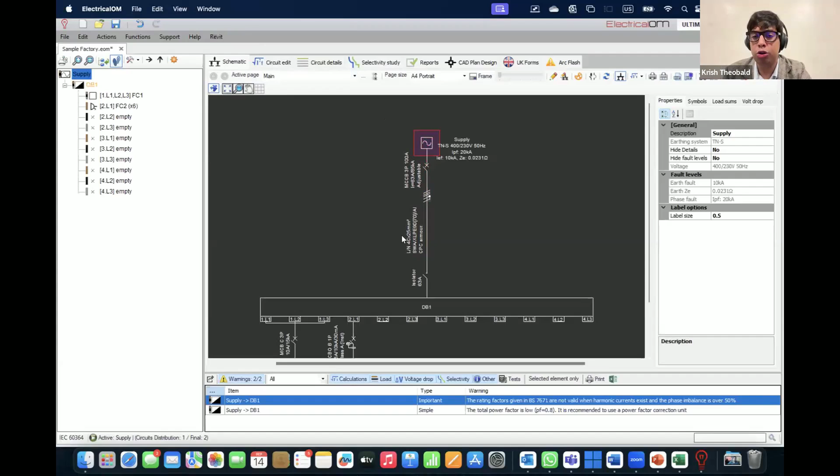Continue, Krish. Yeah. So say for example, I have a transformer, right? And these are my transformer characteristics. I have a fault current contribution of this transformer. If it is a low voltage supply, I have measured the earth fault loop impedance and the respective short circuit current, so I know what its contribution is. How does it calculate minimum fault current? What it essentially is doing, it is saying that I have a cable of this much length. This is the resistivity of the cable. This is the reactive component to that. Then it says that this is the temperature of the conductor, and then this is the fault current.

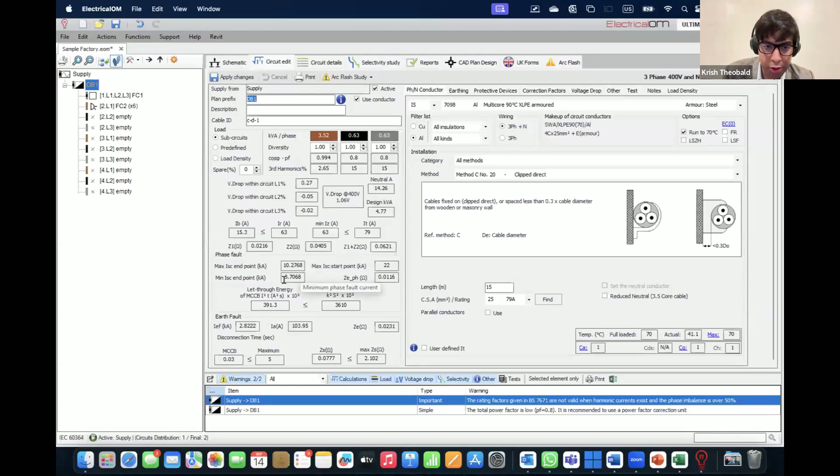So, for example, you see here phase fault. I have a starting point 22K and an ending. So, according to IEC 60909, it has applied a 1.1 factor. So, 20K times 1.1 is 22K. Then max ISC at endpoint of this 15-meter run is 10K, minimum ISC is 3.7K. So now if I change this length to say 20, you see all these values change accordingly. So that is how it is running the calculation. And accordingly, it will say, okay, this is the fault current.

So this is the amount of electrical energy conductors can withstand. Earth fault current is this much. Current causing operation of the protective device required is this much. This is the earth fault loop impedance. This is the time it will disconnect. So all that data is calculated basically based on source characteristics and length of the conductors to the point of fault, to the extreme point. That is how it calculates.

Okay, I think Sir Dominic is there. I think he's not there. Krish, am I audible? You're very audible. Yes. Because I'm traveling, I'm in the car. Should I take up the question, sir? Yeah, I can read. As usual, we have a very interesting question.

Is there any calculation for how many earth pits connected to my 300 milliampere electrical loaded system? I think this confusion is never going to end. Probably we don't need to answer. Or you'd like to answer this question? Yeah, I will simply say, why do you need earth pits? Okay, if you have a TT installation, yes, you can input an earth electrode if you want, but say this installation I made it as a TT, then I can put in a resistance of earth electrodes, 50 ohms or whatever, and that's fine.

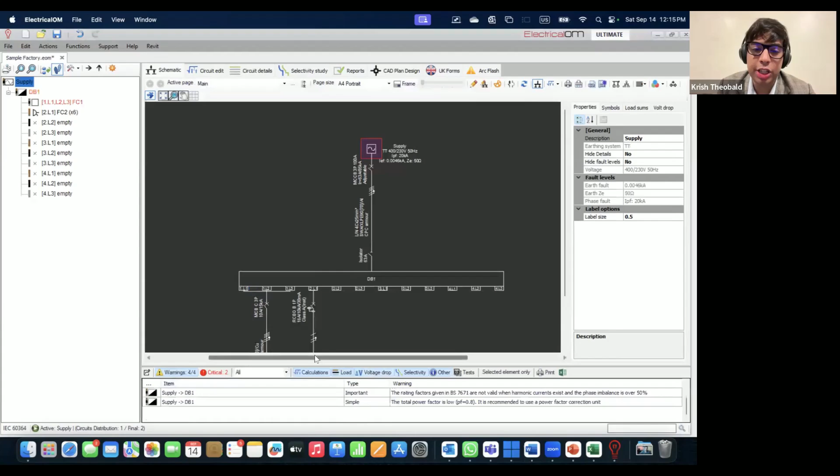Now, see if I 50 ohm, now again I'm giving issue. So it's saying that this circuit cannot disconnect. So then I need to add an RCD. Say I add an RCD, make it, I don't know, say 63 ampere RCD with a 500 mA. Then that warning will now go away. So essentially that's how it works.

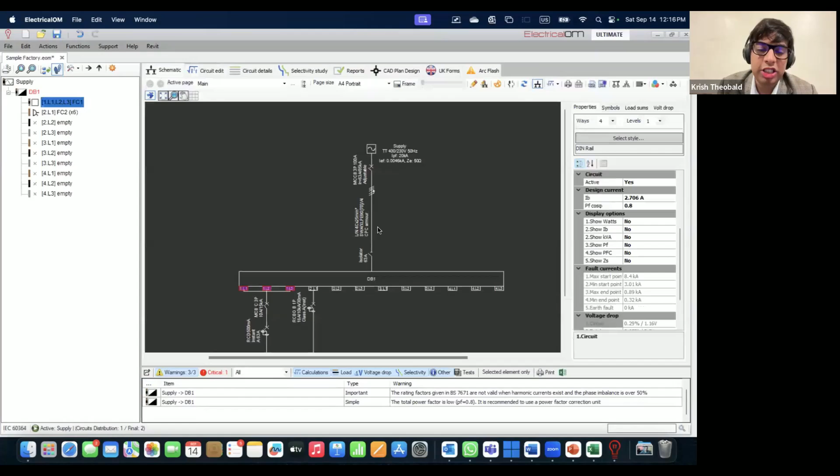But now it's giving me an issue here. There is nothing here. So now I will add an RCD here again. So here I will probably need to add a relay. So say 300 milliamperes here. Now it is giving me a warning because both are this thing. So if I go here, I say earth leakage relay adjustable and whatever. So basically you get the point.

I can add an earth electrode, but how many earth pits are required? That is a ridiculous question because that is not a matter for low voltage installations in any case.

Krish, then there is a question. Does the software take into account the severity classes that you have explained at Surat workshop for the selection of the protective device? You mean the rating factors? Yes, absolutely. So again, I will show you. Just a moment.

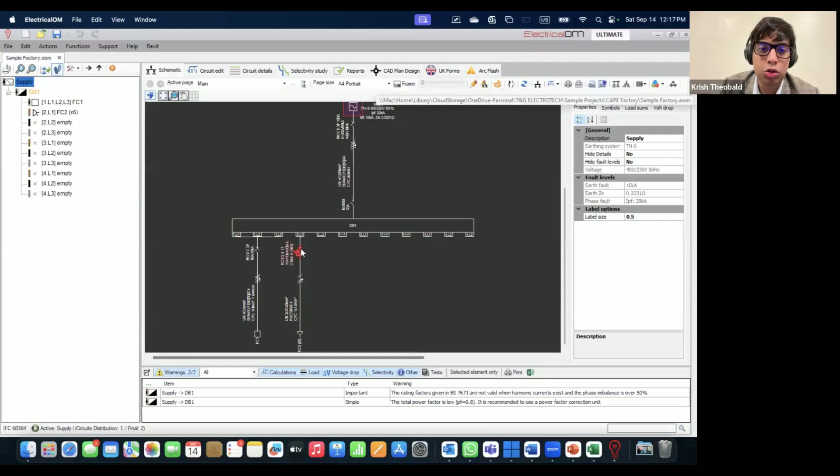So if I choose this circuit, for instance, I can go to the correction factors and enter CA, CG, CH, CUV. I can enter all of these factors. Is it bunched? How many circuits? All of these are obviously taken. Obviously, you can't do electrical design without this. So basically, that question is answered. Yes, it's possible.

There is a question from an anonymous attendee. If there is any possibility to make it more India specific in terms of the type of CPC material. Currently, I believe that only copper, aluminum, while India being cost sensitive. The question is whether the PE conductor, galvanized steel, is allowed. Yeah, we are very open to adding materials and products.

So yes, if you give us the details of the particular, so what is the resistivity, so on and so forth, as long as it is according to the standard, we can add that. That's no problem. Okay. The answer is yes. We are working on it, and GI galvanized steel also will be added as a PE conductor. Okay.

I think there are not many serious questions. There's already, Purnachandra is asking. Sorry.

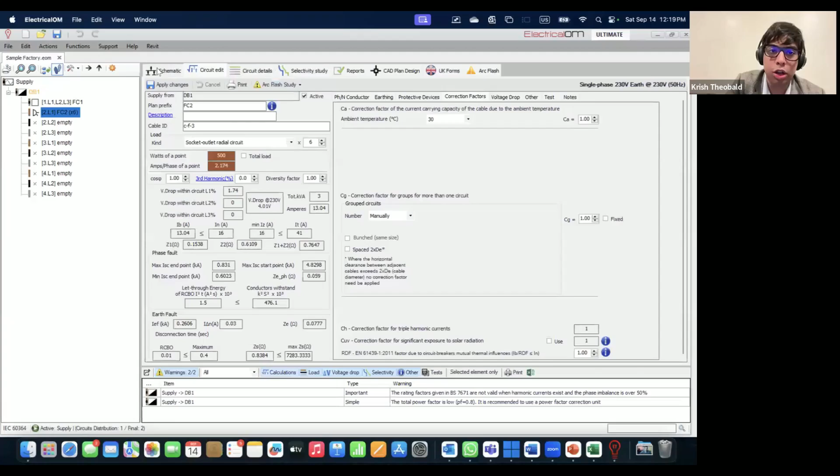So like I showed earlier, I will just reiterate. If instead of an LV supply this was a transformer, that's not a problem. I can add in a transformer. I can enter all of this information, calculate the short circuit current, calculate the prospective fault current. Obviously, it's a low voltage design software, so it's not going to help design a substation. However, the implication of the substation on the installation is what it considers.

Sorry, we have a question: can the software be integrated with Revit? Yes, absolutely. So just like we've done it with the internal CAD platform, it can be integrated with Revit, and there is a Revit add-on. So I will just show you. You go here, Revit, and you sync from Revit or export to Revit.

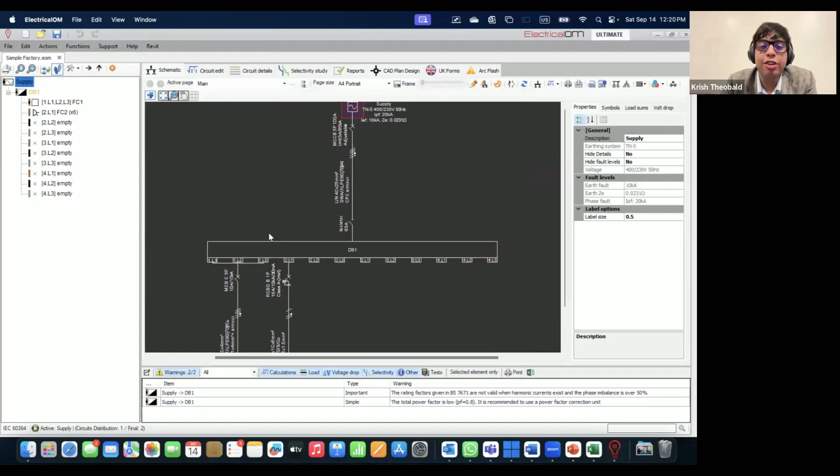Okay, you were able to see the questions. Yes. Yeah. Yes. Am I audible? Yeah.

Go ahead. Then will it be compatible with the eQuest simulation software that is now going to be popularly adopted in LT distribution networks for buildings other than industry under the Energy Conservation Building Code regulations in Kerala?

Sorry, I am not familiar with that software. Actually, this software is an American software which is only approved. eQuest is approved in Kerala state for simulation activities for buildings. There is also an extension for electrical design available on that, but I didn't experience that. But the simulation for an HVAC system is very, very beautiful, except that it doesn't support the VRF machines. That's the only constraint.

We will deeply discuss this matter with the Energy Management Center, Kerala, with the electrical inspector. You can take this forward with Krish one-to-one later. Probably you can give some reference to him to have a look at it. So you can talk to him later, sir, directly. Yes, thank you. Okay, thank you.

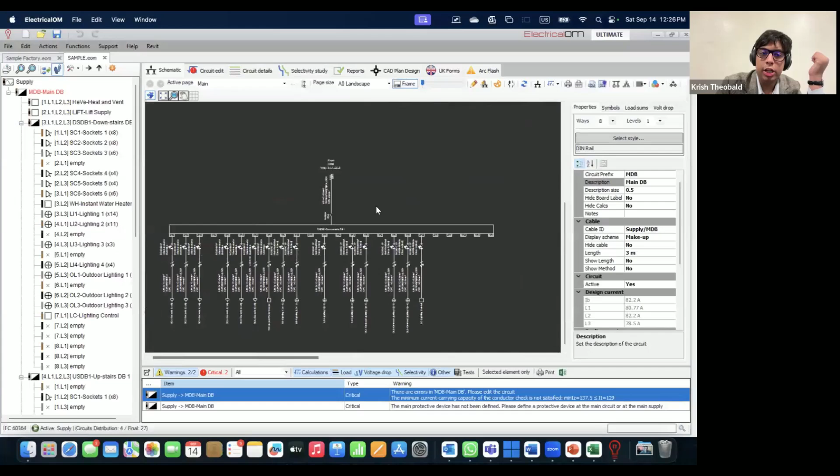Okay, so you see here in this particular instance, we have got a very large electrical installation. Well, not thousands of circuits, but a relatively large installation. This is the main DB. This is your panel. We've got one circuit for heating, one circuit for an elevator, two downstairs DBs, one upstairs DB, and then the actual DBs themselves have a variety of circuits. So, that's how it is.

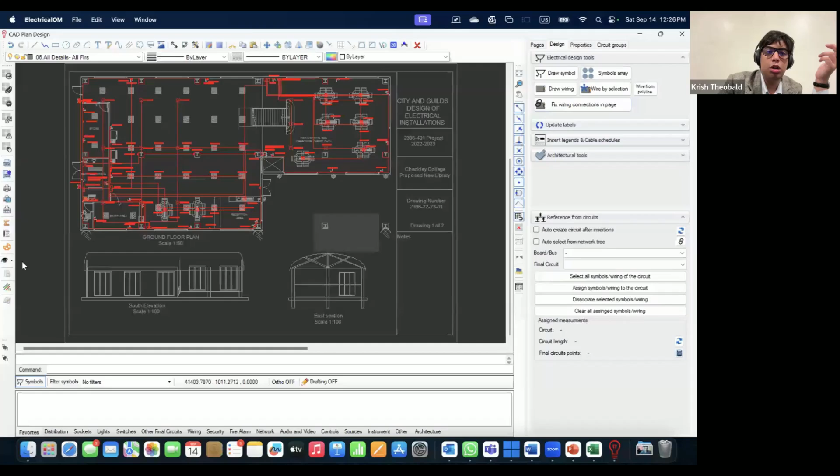And if we look at our CAD plan separately, you see so many different circuits. So if we look at the details of all floors, we have a very elaborate installation. So this can also easily be modeled, no problem. And it will save you a lot of time.

The main thing is, when we design electrical installations, normally you do something in a schematic or SLD, then it has an implication on the calculations, and then it has an implication on your BIM or CAD. Here, one change you make, it affects everywhere. Secondly, when you do calculations on a spreadsheet, how do you know that your calculations are actually right?

So this software and the calculation engine has been certified by the Chartered Institution of Building Services Engineers. So a lot of time saving and accuracy is taken into place. You only have to make a revision once and it revises everywhere on its own. Plus, once you're integrated with Revit and all, for your entire project, it makes your life much, much easier because, like I said, you revise it only once.

You see, one of the challenges which designers often face is changes. Initially there is one style, then weekly it keeps on changing. With the software, I think it's very easy to make these changes and integrate them into the other drawings.

Yeah. Exactly. So, Purnachandra, yeah, go ahead, sir. Yeah,

with the software, the designers are able to make smart and economical designs. See, economics, the cost saving, is also one of the subjects which we need to seriously think about, because in a lot of cases, with these thumb rule calculations, oversized devices are used. I think maybe in 50-60% of cases. In one case which I tried with the same software, all the devices and the circuits were oversized, too much oversized.